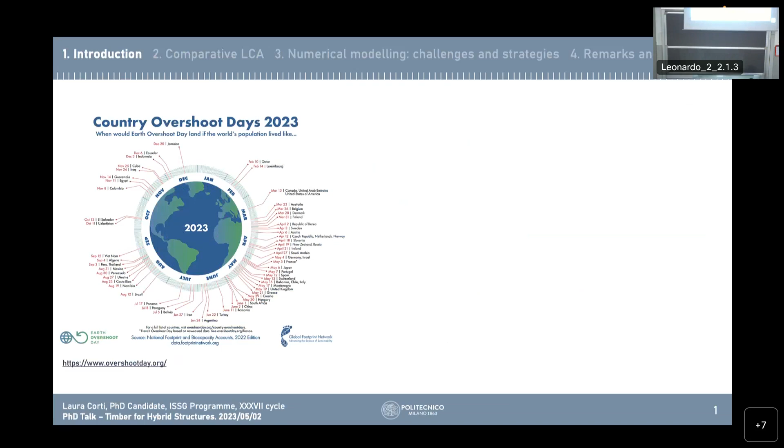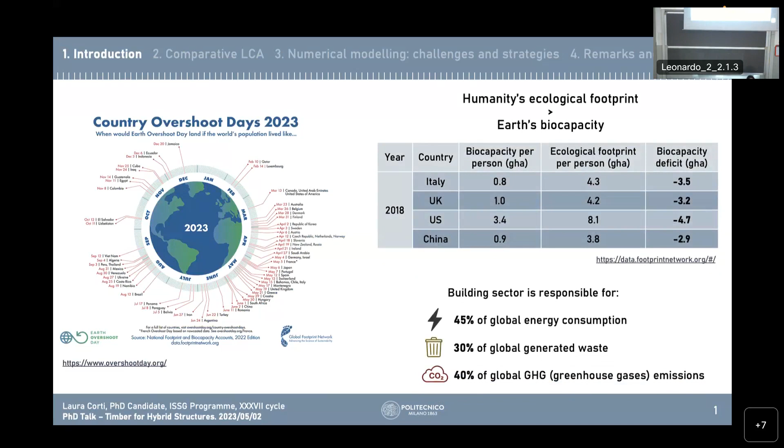So what is the problem? Humanity's ecological footprint is greater than the biocapacity, so there's a biocapacity deficit for basically all Western countries. If we focus on the building sector, this is responsible for 45% of global energy consumption, 30% of generated waste, and 40% of global greenhouse gas emissions. These are some data that I think is worth thinking about.

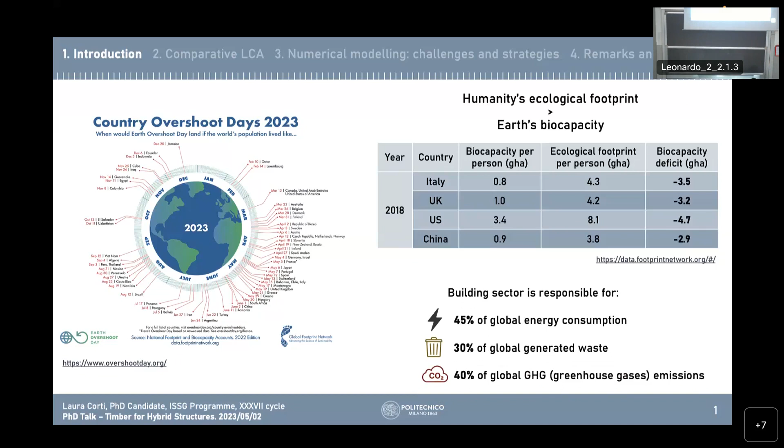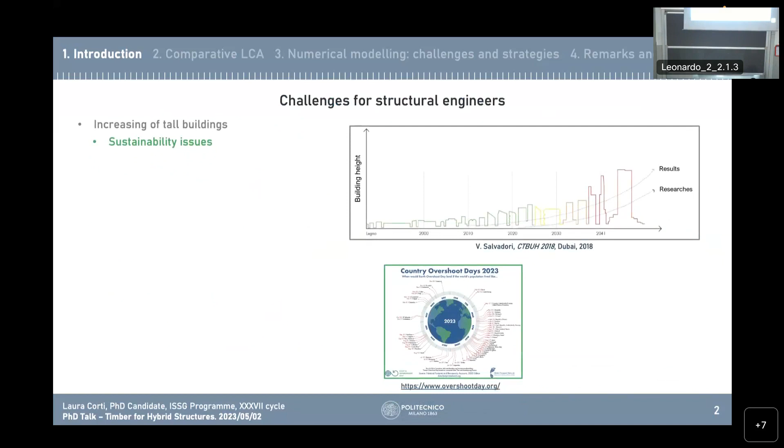So as structural engineers, we should face some challenges. First of all, the increasing of tall buildings, then, as said in the previous slide, sustainability that cannot be avoided, and then performances for exceptional actions, for example during earthquakes, like in the pictures.

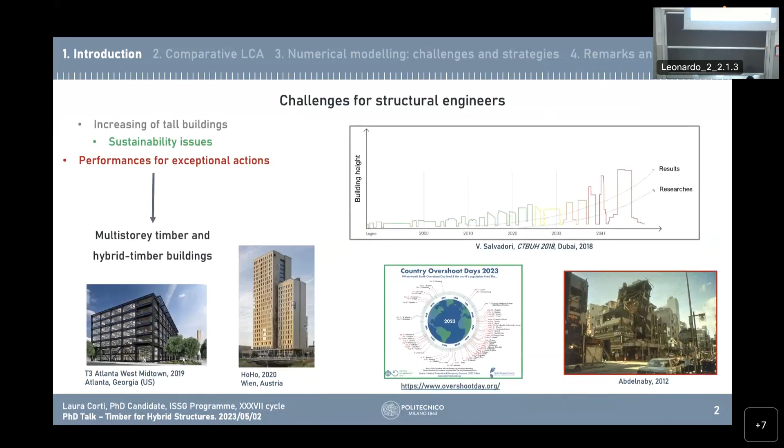A solution that I'm studying is multi-story timber and hybrid timber buildings. This could be a valid solution. The main issue is the implementation of strategies to reduce buildings' environmental impact while maintaining the structural performance, like timber hybridization.

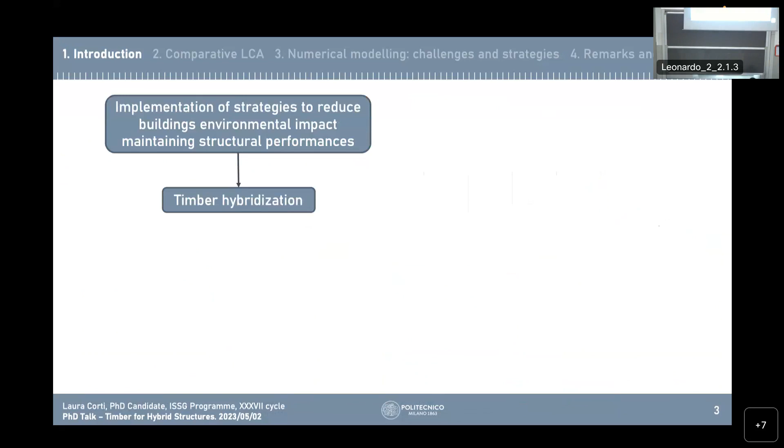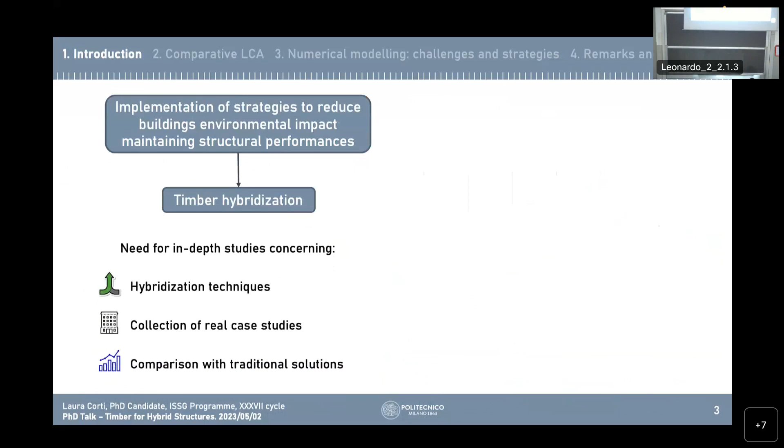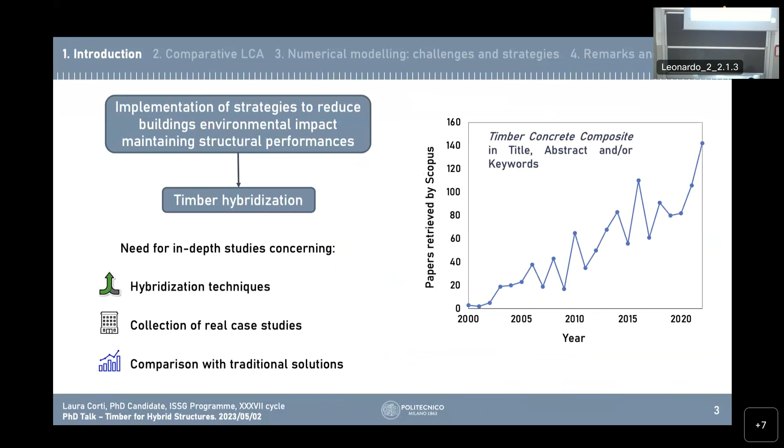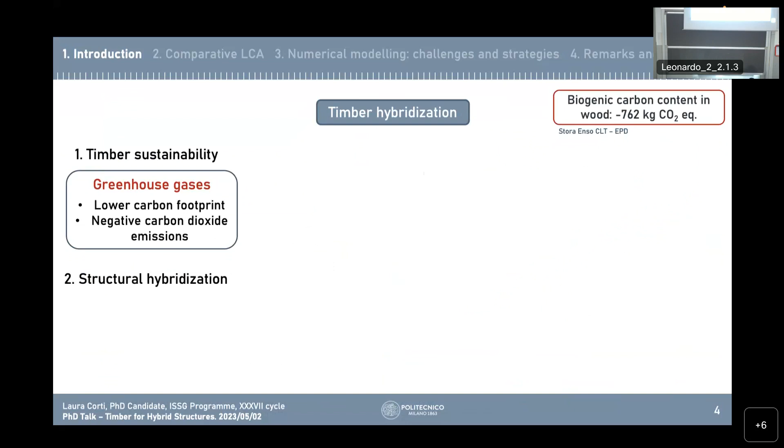Concerning timber hybridization, generally it is faced in two tasks. First, timber sustainability, which is characterized by greenhouse gases, and in particular we have the biogenic carbon content of CLT, which is a specific type of engineered wood, so we can see this gives negative carbon dioxide emissions. Then we have the construction site: there is a high level of prefabrication, which makes the construction time much faster, and then obviously we have lighter elements.

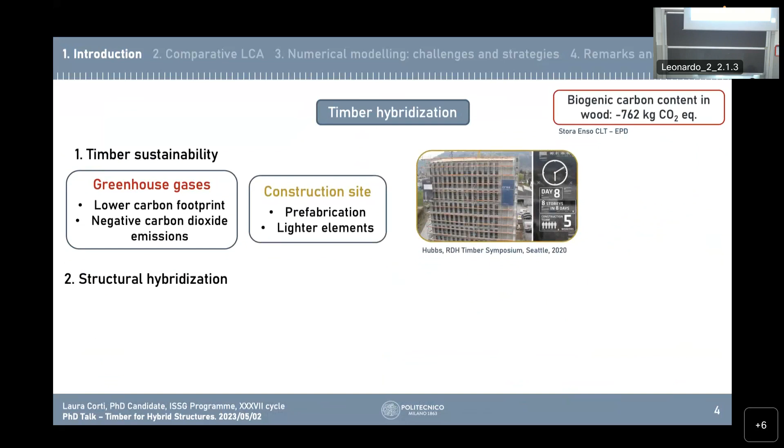Then, concerning the structural hybridization, at the element level we can have both factory-built components and tailored components. This material is characterized by very high adaptability. And then finally, we have to think about the building level.

So we should assemble all our parts according to required performances. For example, we can observe the last picture, which is a 10-story timber building subjected to a specific earthquake.

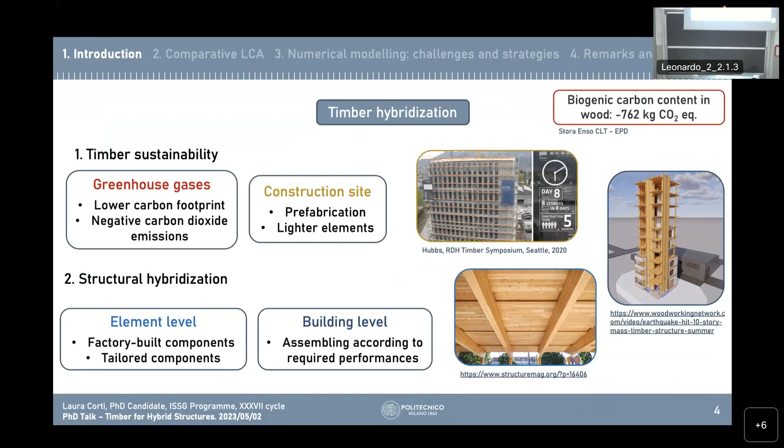Now it's important to consider timber on its own. We spoke about timber as a composite with other materials, but now let's focus on timber, which is an orthotropic material. This is a very specific characteristic because the response of the material depends on which axis is stressed. We have the best performance in the longitudinal direction, and on the other hand, the worst performance in the radial direction, because many discontinuities are made by the forces.

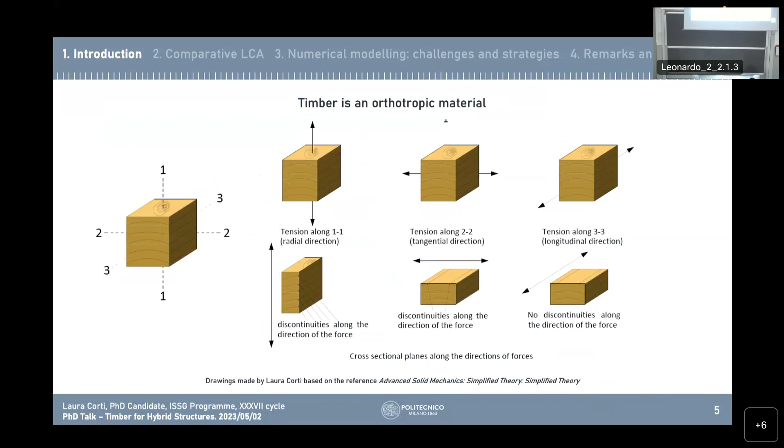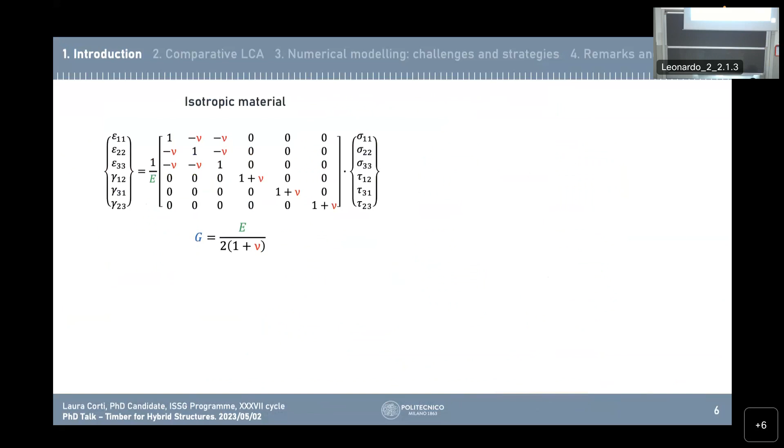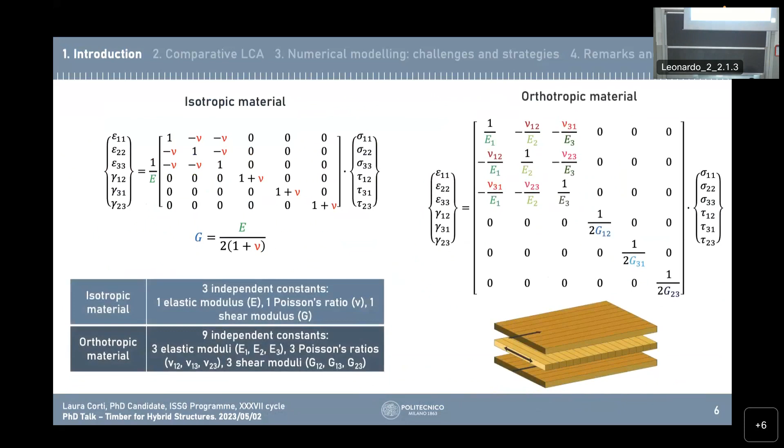We are generally used to see this type of equation, which is adaptable for steel, but as we said, timber is orthotropic. So we should use this equation, which is a little more general than the isotropic one. They have different characteristics: for isotropic material we have 3 independent constants, while for the orthotropic one we have 9 independent constants - so 3 elastic moduli, 3 Poisson's ratios, and 3 shear moduli.

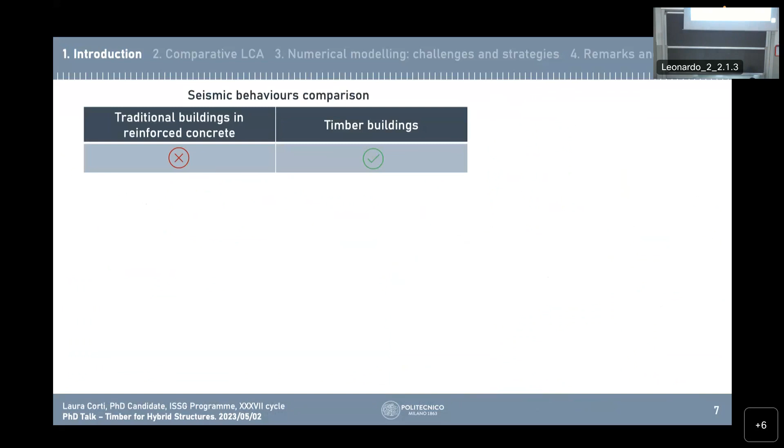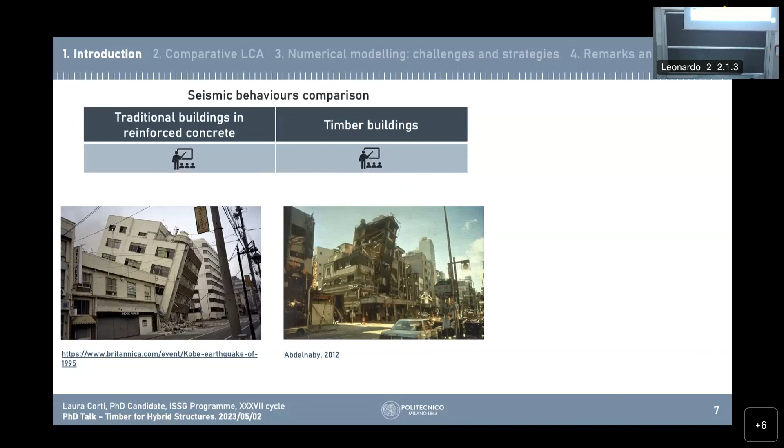This common belief that I mentioned is based on the fact that timber is very flexible, and this is true, but timber is also brittle, so basically the failure happens without any plastic phase. So this is a big problem.

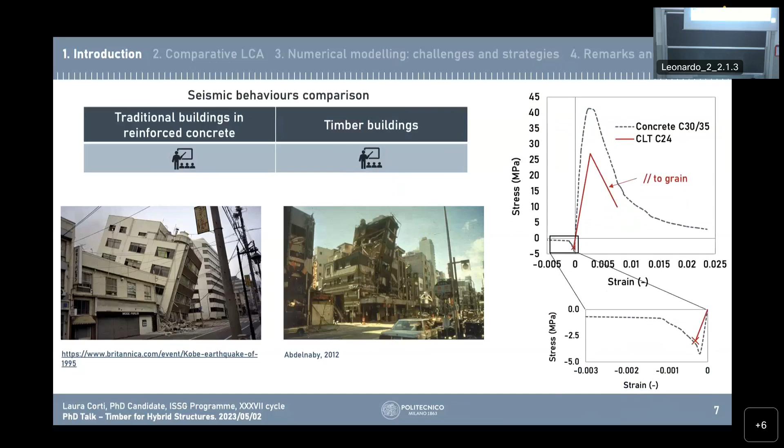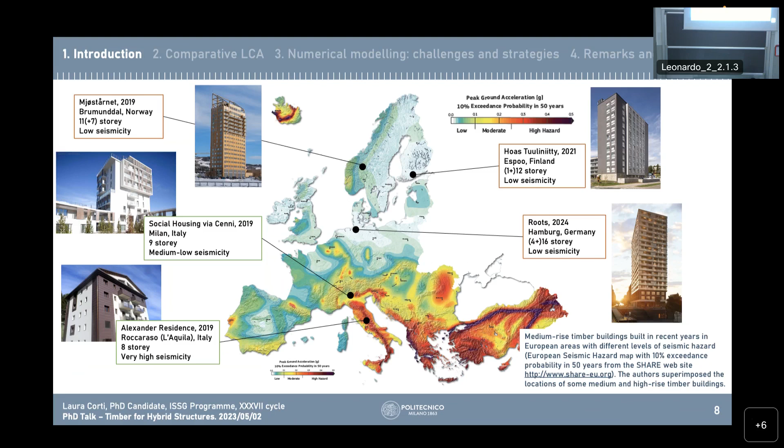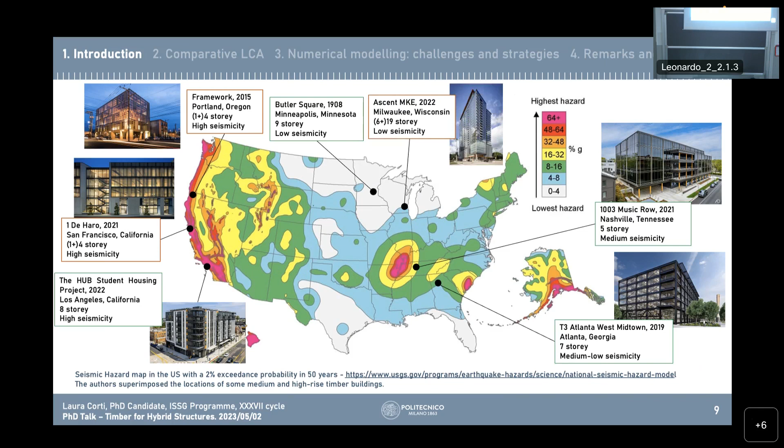More or less the same situation happens in America, where we have the tallest timber building in the world, located in Milwaukee, but it is in a very low seismicity area. Just to give an idea, this is a 25-story building where the 6 lower stories are reinforced concrete and just the 19 upper ones are timber. This is very common practice to give adequate lateral stiffness to the whole building.

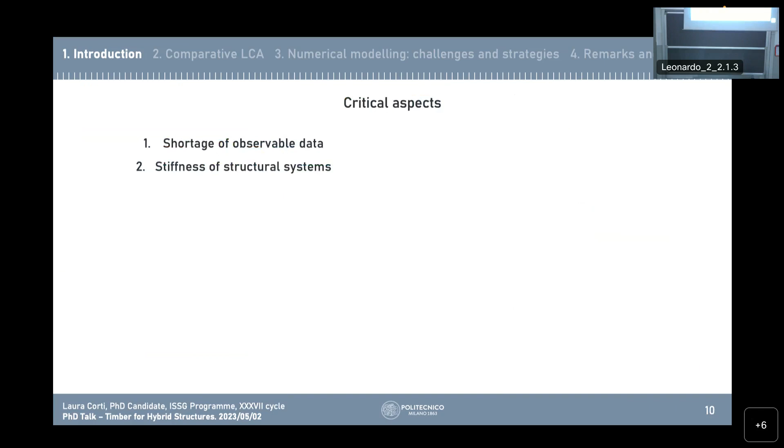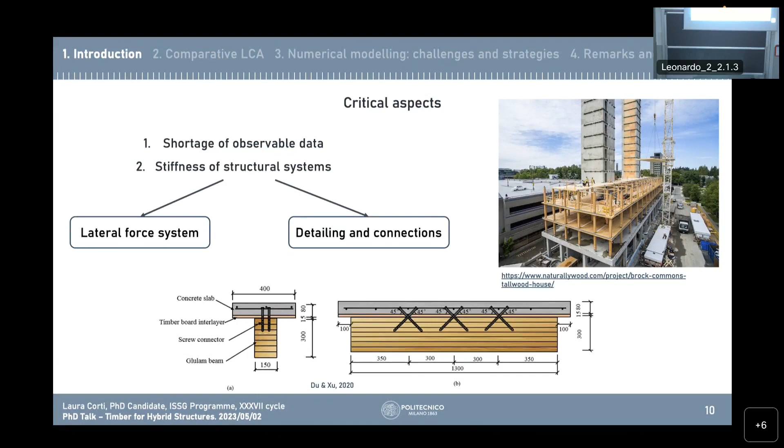We have now focused on the structural part, but how can we actually compute the environmental performance with the life cycle assessment analysis, which is regulated by ISO regulation? Life cycle assessment studies all the phases of a product, but we are focusing now on buildings. We have stage A, which focuses on product and construction phases, then the parts covering maintenance, repair, replacement, and also energy and water use, and then the end of life - what happens to the materials at the end of life of the building.

And then we have stage D, which is actually not mandatory, but is fundamental if you consider buildings in particular, because just in this way reuse and recycling are counted.

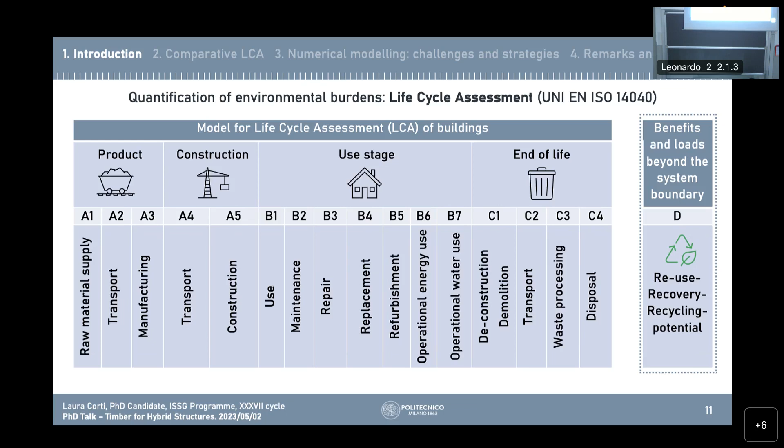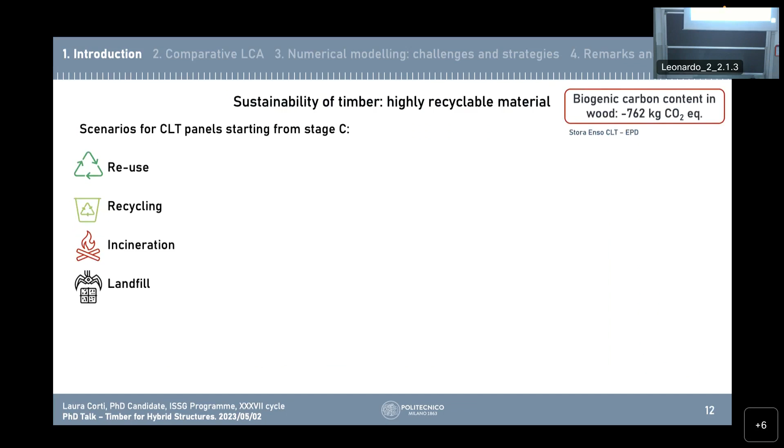As we said, timber is a highly recyclable material, and we have different scenarios. The first two are reuse and recycle. Reuse is keeping the members and using them for other structures. Recycling means we keep the members, make sheets, and then make other members. Then there is incineration, and then landfill.

So we can see the differences. In the first two cases, the two stages C and D are balanced. But if we consider landfill, we do not have any advantages for timber use. So these are the different scenarios.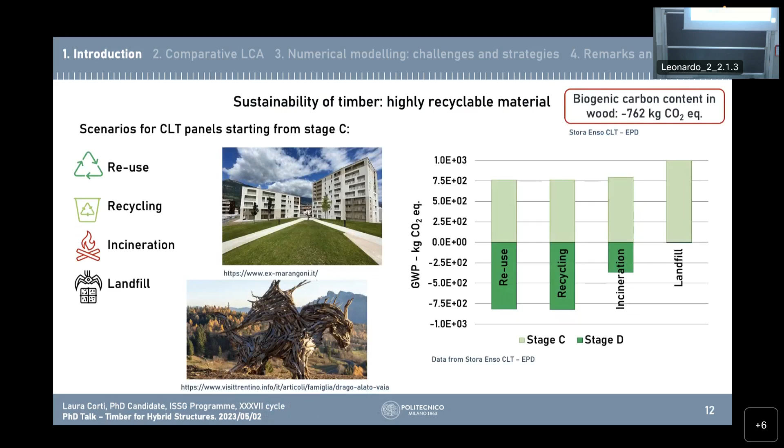So, focusing again on sustainability, I've made a research on the state-of-the-art review on comparative life cycle assessment of timber and reinforced concrete multi-story buildings, which ended in a publication at a conference.

This research was characterized by a two-step methodology. The first one was the collection of data, basically papers comparing these two types of buildings, and then these data were analyzed.

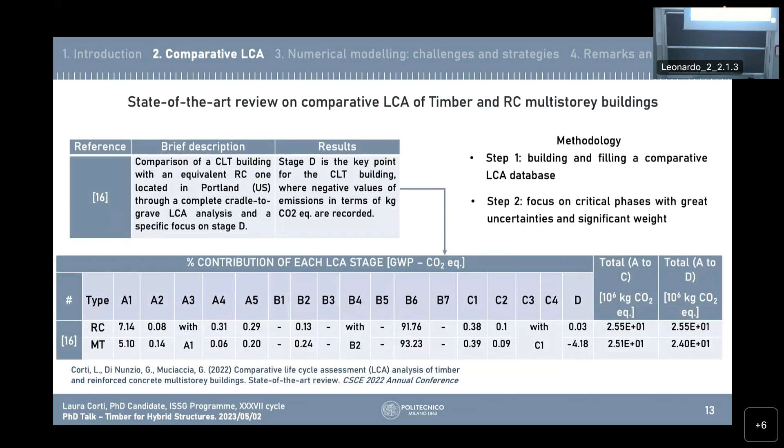The results were focused on critical phases, so phases characterized by uncertainties, such as non-standardized and significant weights.

This leads to this summary chart where we can observe that phase B is always very impactful and rules the whole life cycle assessment, both in reinforced concrete and in mass timber or timber hybrid cases. But we can also see that considering a cradle-to-cradle analysis, including the recycling phase D, we have several advantages for the exploitation of this phase.

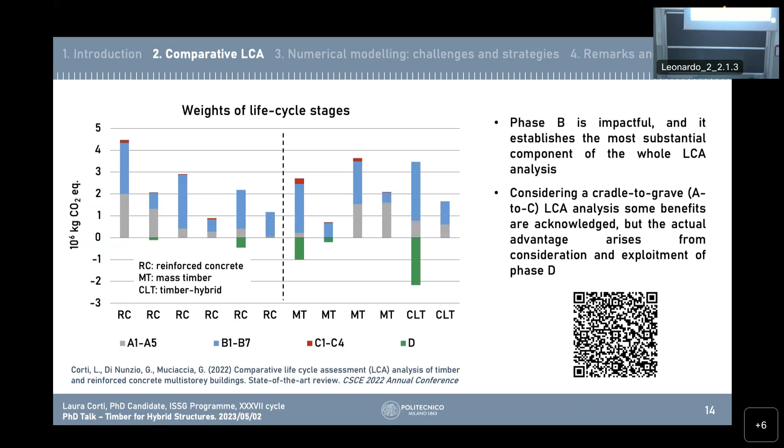Then we can move to the case study. We have this case study characterized by this plan, a building located in Milan. This is a region characterized by low to moderate seismicity, and this is a residential building with 8 floors. On the lower part of the page, on the left, we see the original layout characterized by RC structural cores, and on the right, the alternative solution with CLT shear walls.

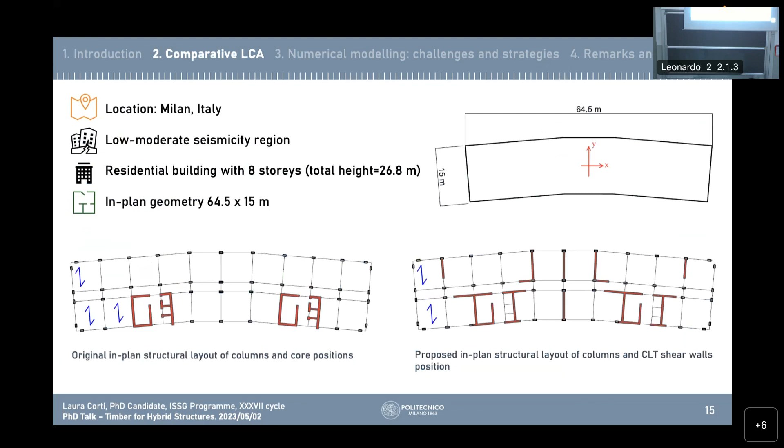Mainly 3 solutions were suggested. The first is the traditional one, the reinforced concrete solution, where everything was made of concrete. Then we have the 2 hybrid solutions. The first, H, is characterized by steel columns and steel beams, plus walls and floor panels. Then the W solution, which is between H and RC, is characterized by steel columns and beams, floor panels, and reinforced concrete walls.

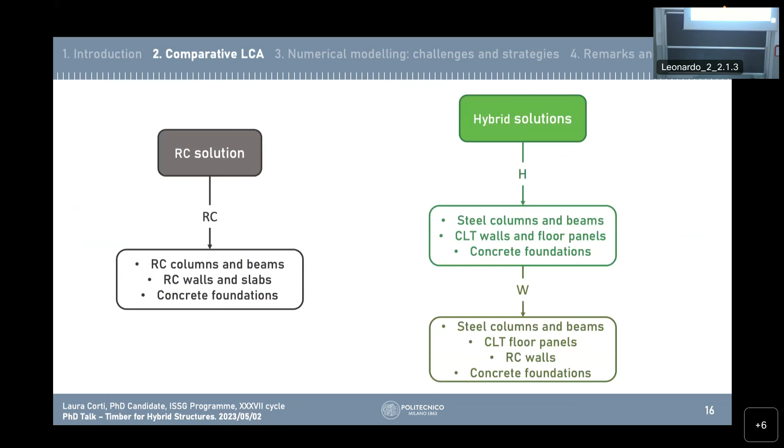So just to compare the 3 solutions: considering the hybrid solutions, steel quantities from the bill of materials were inserted into the Athena Impact Estimator for Buildings, a software that, according to international standards, carries out the life cycle assessment analysis. Then the environmental product declaration data were added.

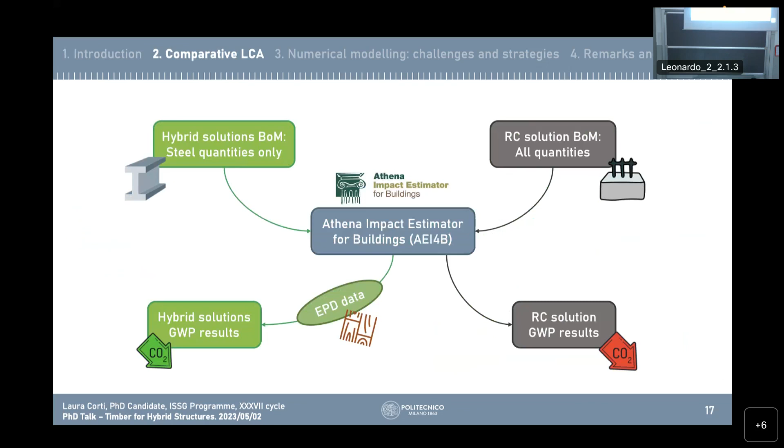Then the data concerning carbon dioxide emissions were calculated. More or less the same was done for the RC solution, but in this case all quantities were inserted into the software.

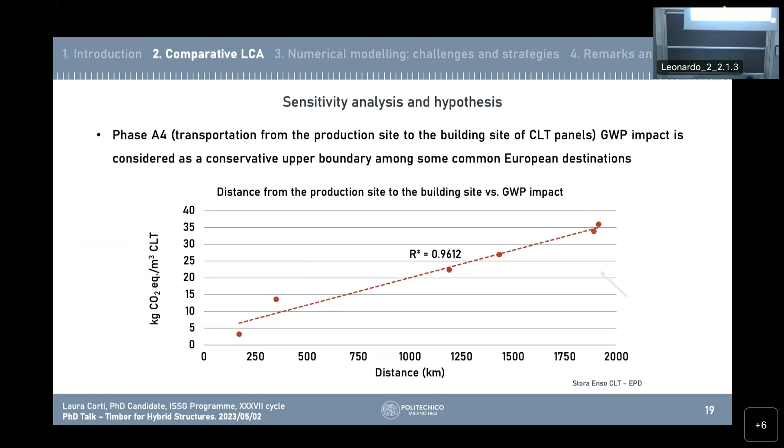Skipping to the actual results, we can focus on some sensitivity analysis. Considering CLT, we have the transportation phase which should be accounted for, and we can observe some distances according to common destinations.

In order to be on the conservative side, we consider the data highlighted. Then, considering stage D, we can notice that in literature it is neglected because it is cumbersome to compute. In our analysis, it was first disregarded, then computed. According to common values from literature, the percentage of total impact was evaluated, and two scenarios were suggested: a low energy efficiency scenario where stage D has much greater weight, and a high energy efficiency scenario with lower weight.

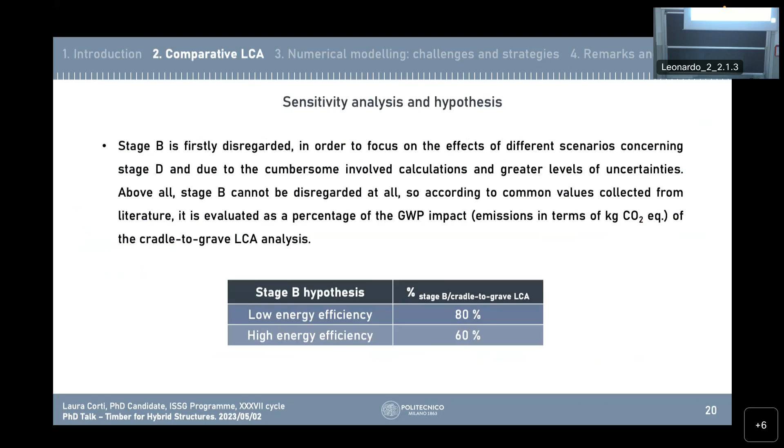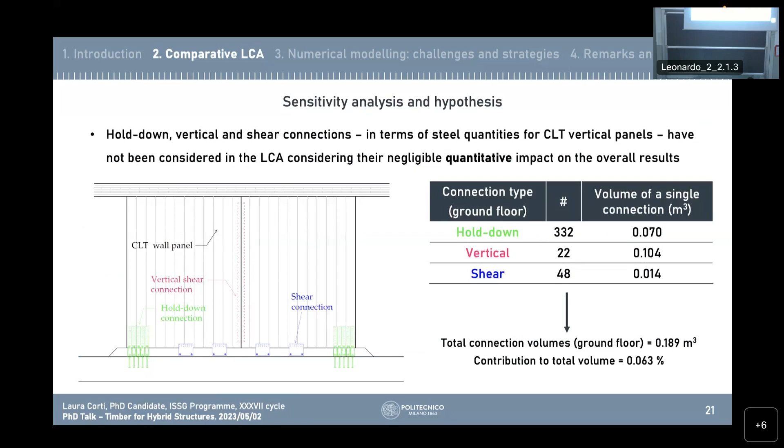Then, concerning sensitivity analysis again, we have this calculation concerning the volumes of steel quantities in terms of connections, and we can see that from a quantitative point of view they are negligible. Obviously they cannot be considered negligible in general, because they are very important to guarantee the performance of the building.

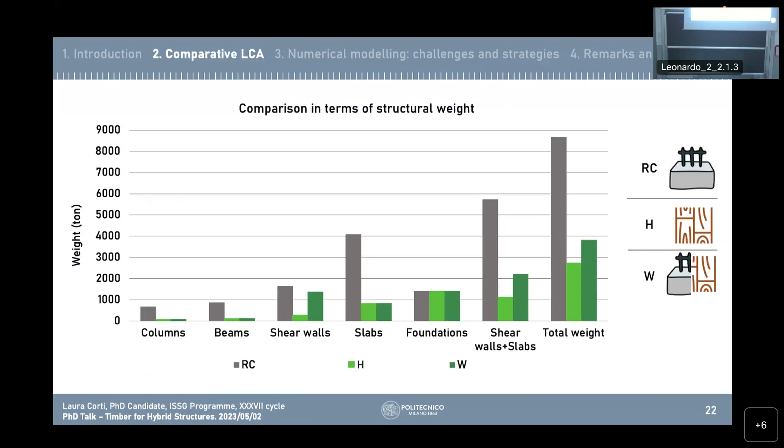Then we can skip to the results. Actually, we can see that the hybrid building weight is more or less one third of the reinforced concrete one, and for the reinforced concrete, the amount is due to the slabs.

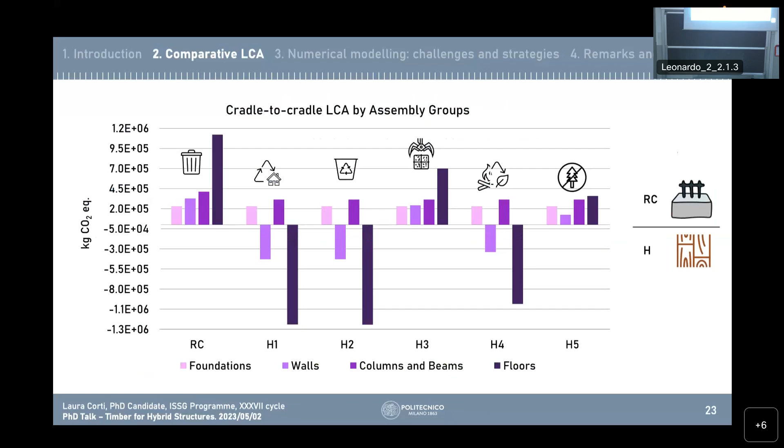Then we can pass to the results concerning the life cycle assessment analysis, where the results are grouped by assembly groups. We can see that for both reinforced concrete and hybrid solutions, the flows have been negative in one case and positive in the other. We can also focus on H5, where we can see that correct forest management has a very strong weight.

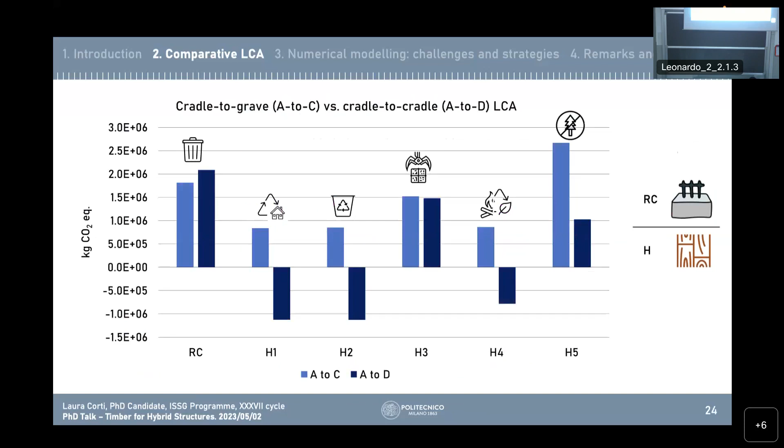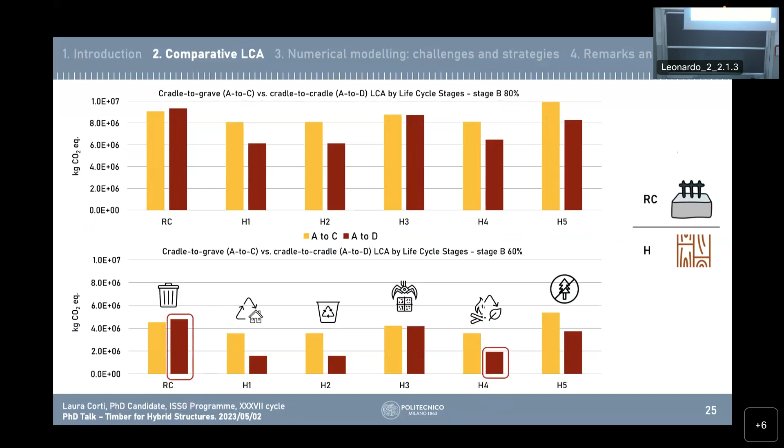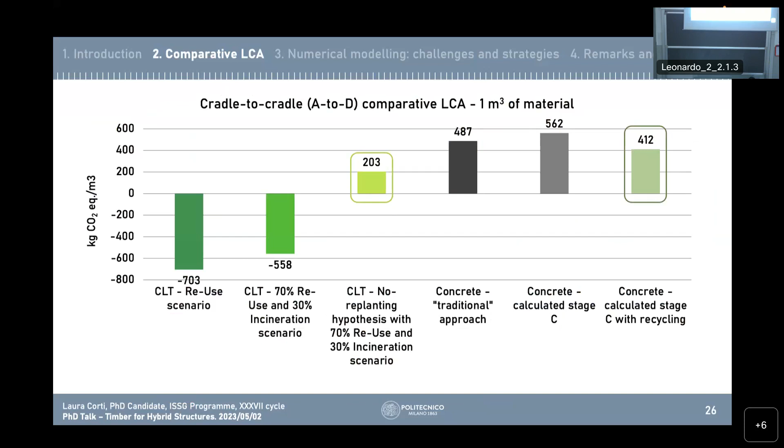Here we compare cradle-to-cradle, considering one cubic meter of material, where we have no replanting versus a real case study end-of-life scenario with concrete and a bit of recycling. Considering these two cases, the results are not so different. Actually, the differences come from correct management, both at the end of life and concerning forest management.

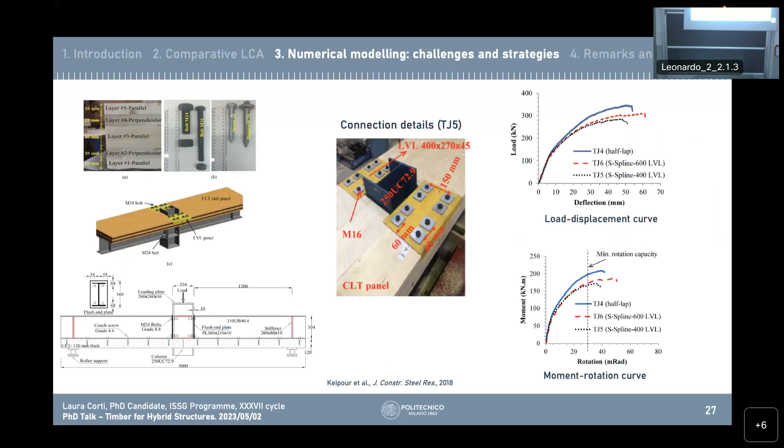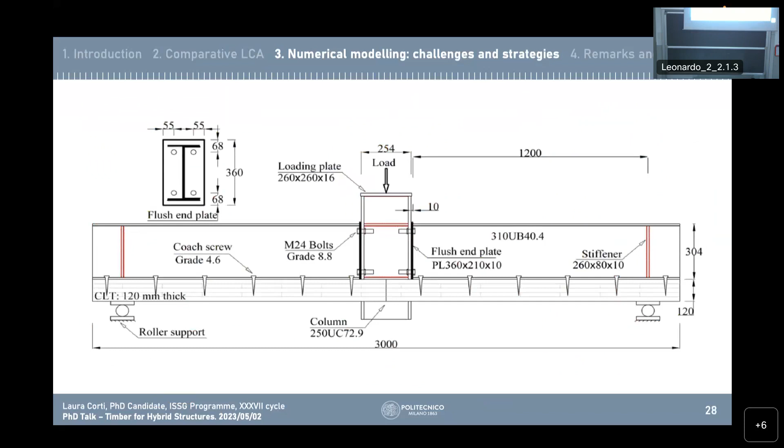Then, through numerical modeling, we consider this case as a benchmark analysis, where there is a beam-to-column connection initially considered just as a part, and then this slab panel was added, with different types of connections concerning the CLT slab considered. This is the layout of the test, where the structure is subjected to a complementary moment, and we have different elements.

The first one is linked just with steel, while the others are linked to timber, and it's possible to observe that mainly timber is characterized by crushing close to the bolts, or even delamination at mode 9. So these are the main failure modes.

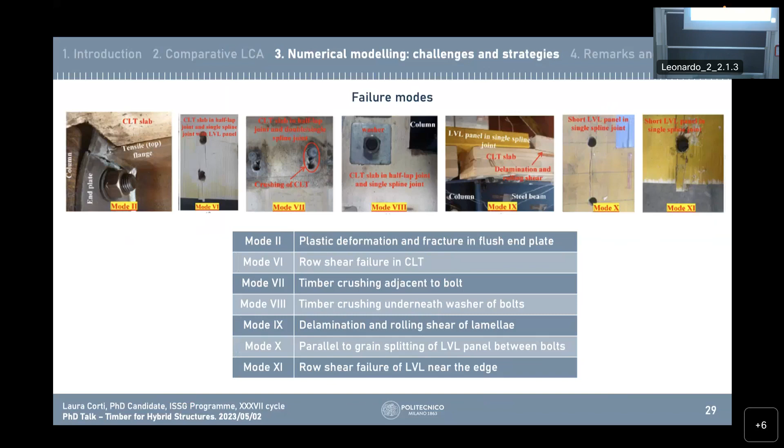So this is the full outline of how I organized the analysis. The first step is the steel joint calibration, just steel. Then timber orthotropic behavior modeling - as we said, timber is orthotropic, so it should be adequately treated. Then we have the push-out test calibration, and finally the steel-timber joint calibration.

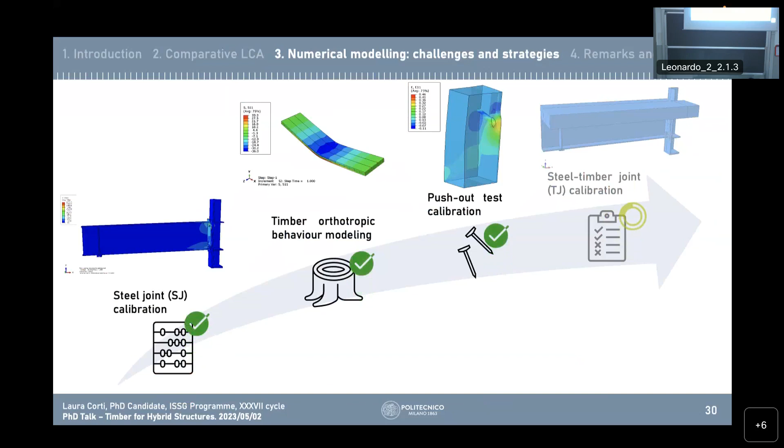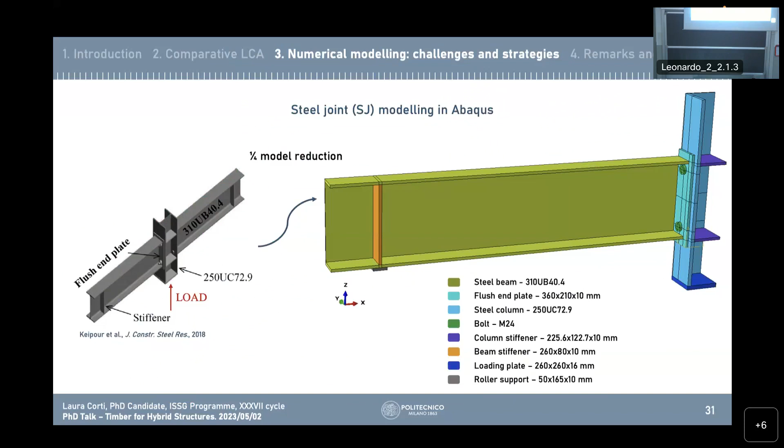I will just focus on the first three steps, as the fourth one is still in progress. I will focus more on some strategies and methodological choices, because I think this is the most interesting part. So these are simply some measures, some values, and after calibration we obtain this score, which is our starting point for the analysis.

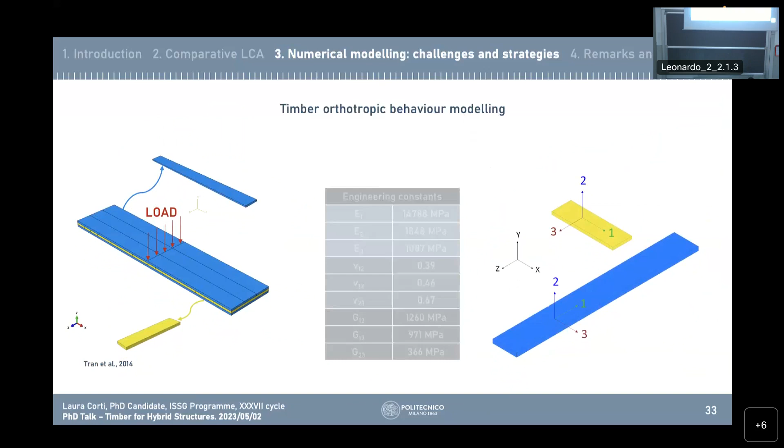Then timber orthotropic modeling, where there are these three-point tests from literature, and these lamellae, and actually the most important step was the orientation of the axis. As we said again, timber is orthotropic, so in this case we put these values directly from literature in order to replicate this test.

What we observed from literature is that it is not so common to find all 9 constants present in the paper. So a little research was conducted to understand some common values, which are represented in the charts on the right part of the page, where the variability of some values is highlighted, and the averages are listed in the table.

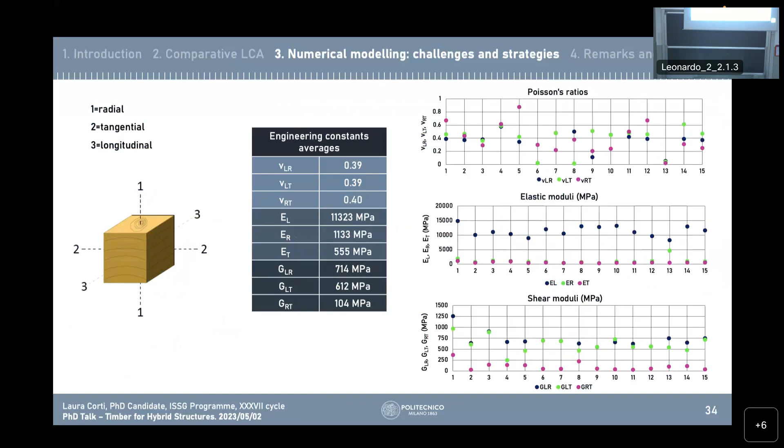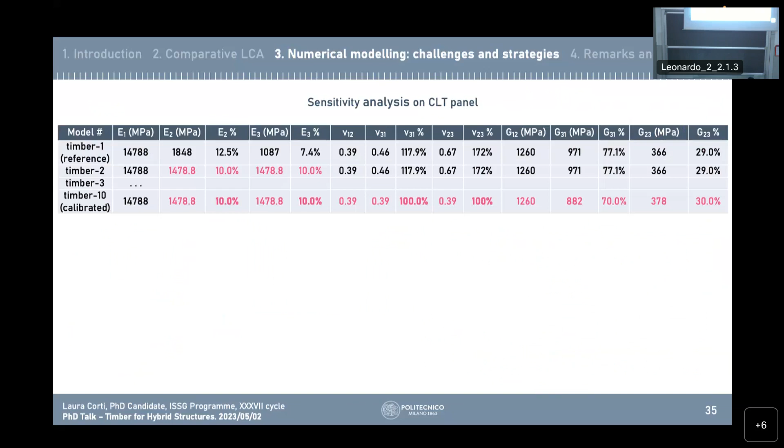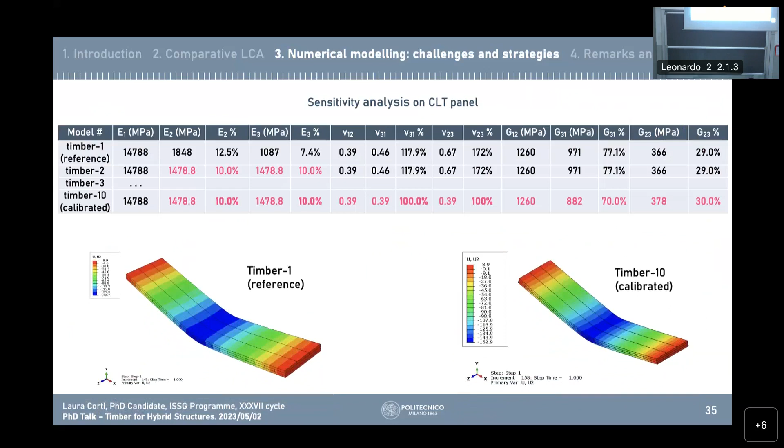Considering this sensitivity analysis, this was applied to the CLT panel mentioned in the previous slide. So we have the first case, timber one reference, which considers values directly from literature, and then different cases with calibrated values. The result is that the outcomes are very similar, so we can consider these percentages for other cases and other types of tests.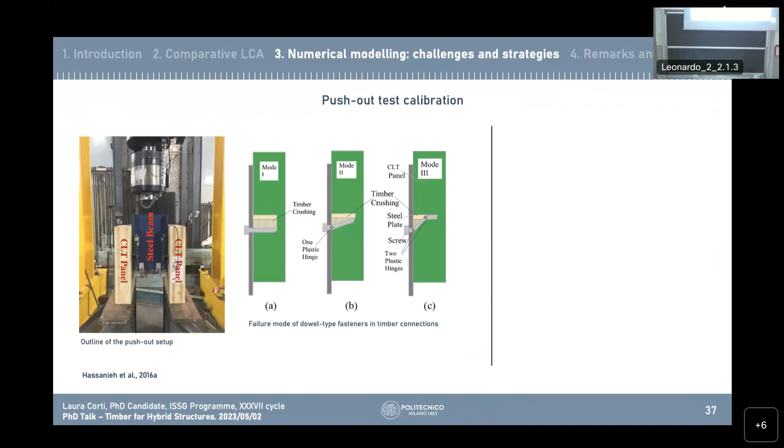In these cases, two modeling techniques were employed. The first was testing with ATENA Červenka, and in this case the screw was not physically modeled, but modeled like a smeared screw, with a user-defined interface behavior. This was the result, so this was a valid approach.

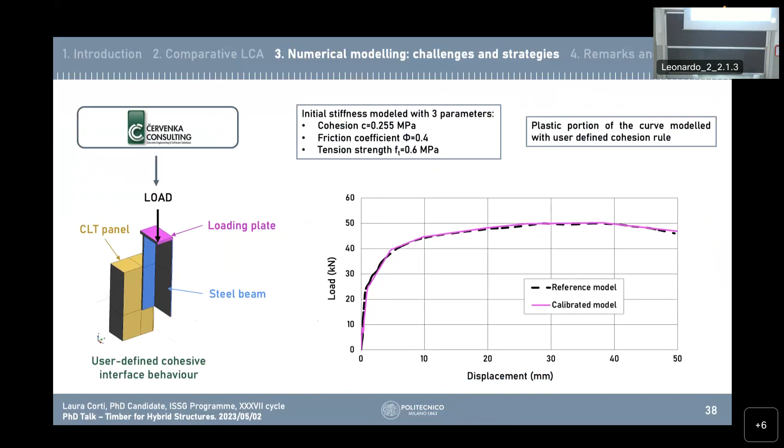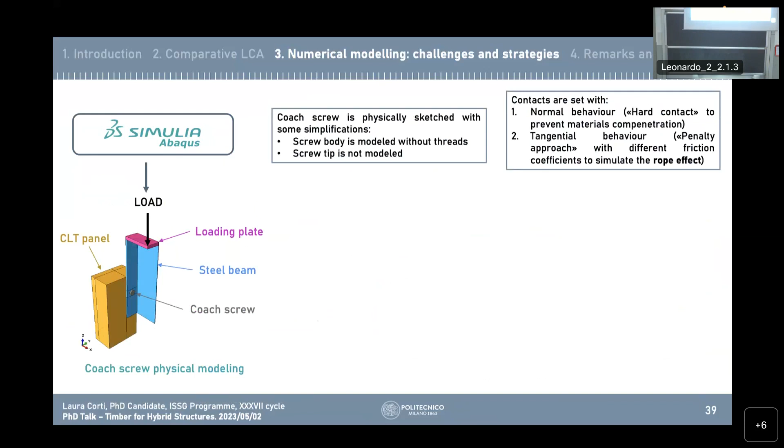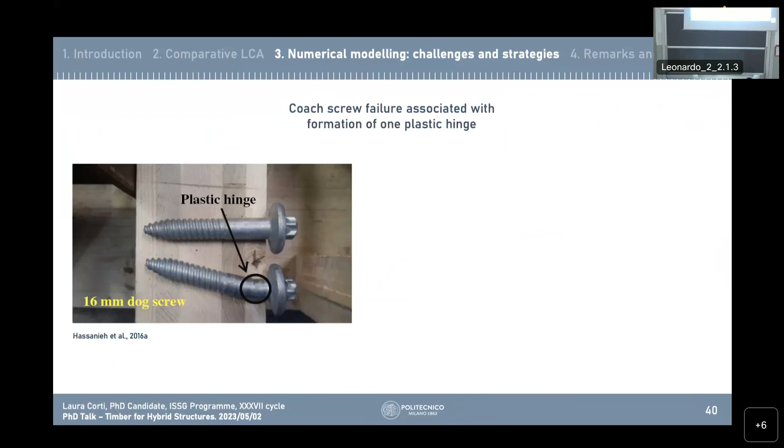Then, just a few comparisons between the experimental results from the literature and my results. So here we can see from the literature this plastic hinge, and it is visible also in the coach screw.

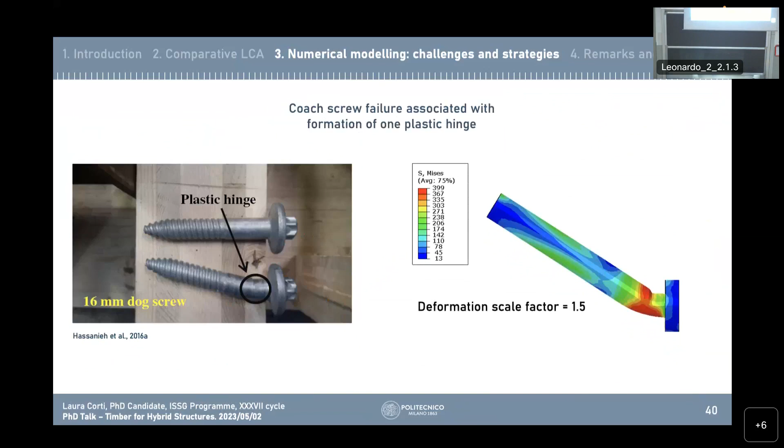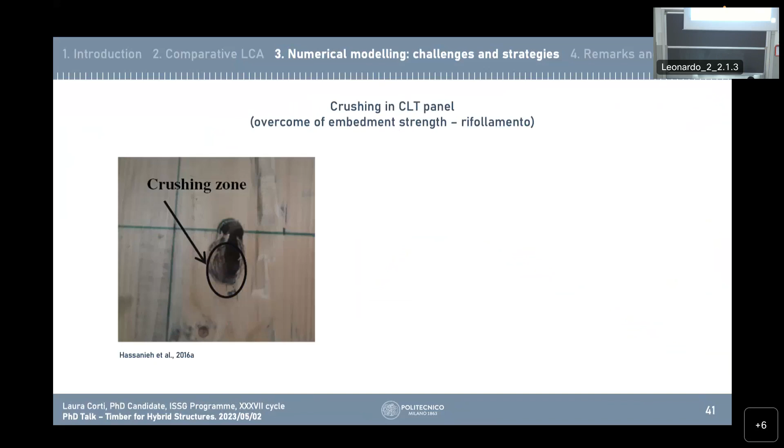And then, again, for timber, it is very important to identify the crushing zones where the overcome of the embedment strength happens, which in Italian is called rifollamento. And we can see that it is also properly modeled in the Abaqus model.

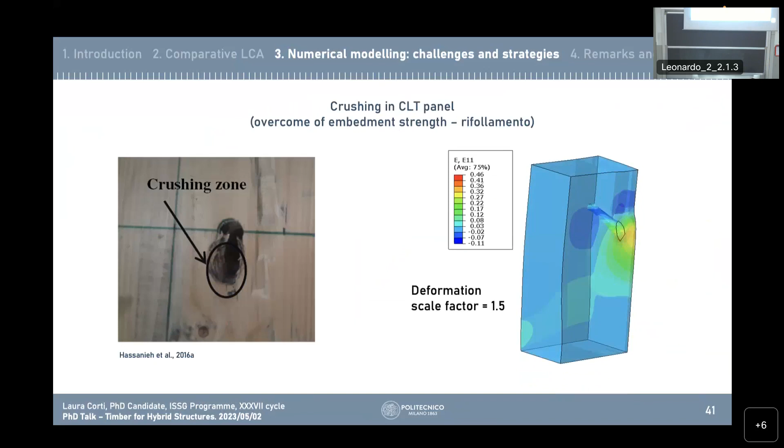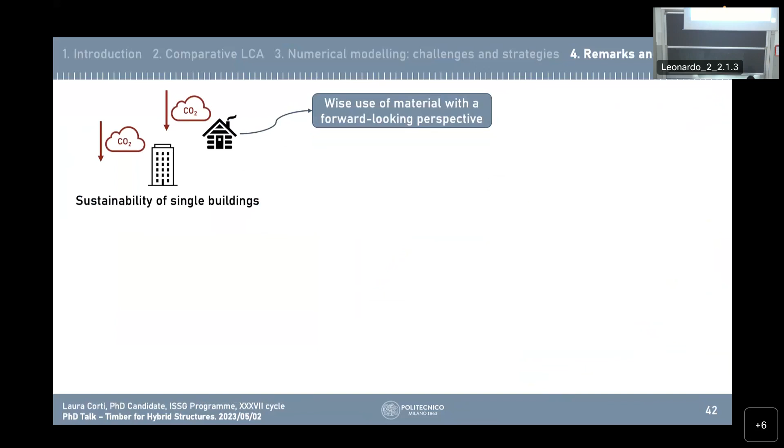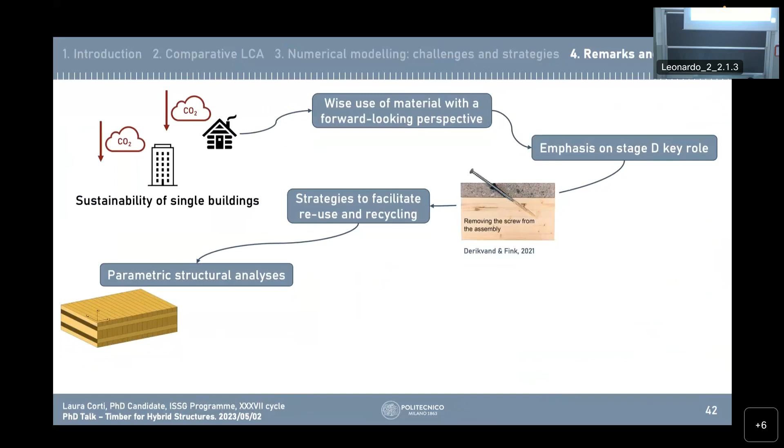For example, there are some demountable screws which help to reuse and recycle the material. And then considering also analysis on other scales, so parametric structural analysis to consider different combinations of materials, different members, it is possible to arrive at the last step: the characterization, the assessment of a parameter to measure at the same time structural performance and sustainability.

But this is just a next step. So in this way, with this flow chart, we can arrive at the sustainability of the whole system.

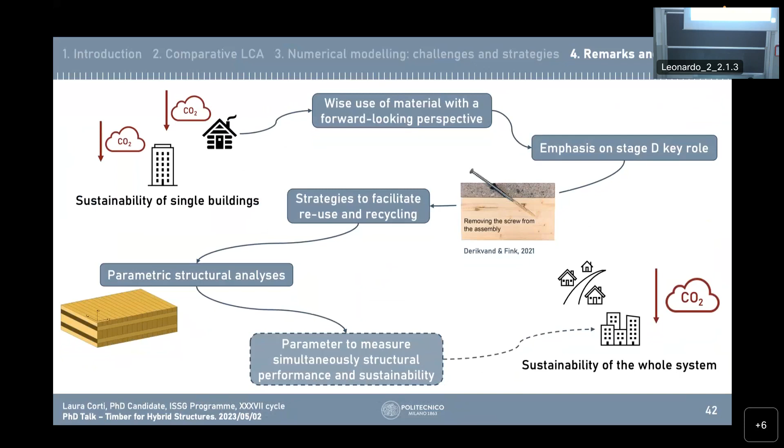The presentation is almost finished. I would just like to focus on a more philosophical issue. I want to underline that this is not the solution, this is just a solution, because there are many solutions. To communicate this concept, I'd like to use the words of a great Italian mathematician, who said that we cannot assume just absolute truth, because otherwise we lose all the points of view. So this is just to represent my idea of the research.